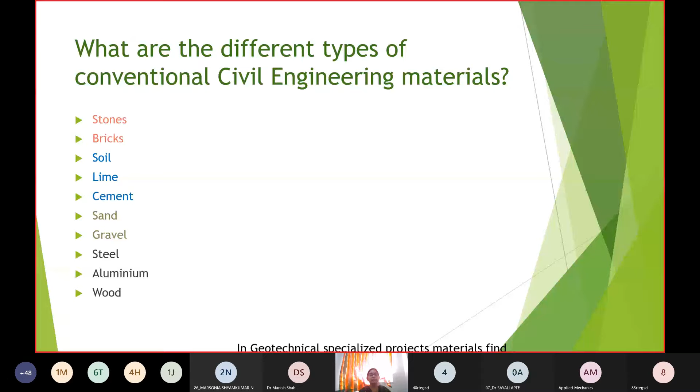So these are the materials which we generally use. And if I talk about applications oriented towards geotechnical specialized projects, geotechnical being my specialization, we use different types of materials in foundations, starting from concrete, reinforcement, cement, and all these. Apart from that, pavements, where subgrade also has a greater role to play to take care of the pavement.

We have different types of pavements, different levels in which the pavement is laid. Everywhere, the material you are using, the quality of material, the type of material, and the life and durability of the material has a role to play.

Embankments are one of the important projects that the government generally takes up. These embankments use a lot of different varieties of materials depending on the project and the type of situation.

Containments, where I talk about maybe a water containment facility, wastewater containment facility, or waste containment facility, be it a municipal solid waste containment facility, a hazardous waste containment facility, or even a nuclear waste containment facility. Every containment facility has a different application and a different purpose to achieve.

Each of these containment facilities needs different requirements or different materials to serve their purpose. We can imagine the extent of research being carried out to identify a suitable material that can act as a good container or containment facility, because it has to take care of a lot of aspects.

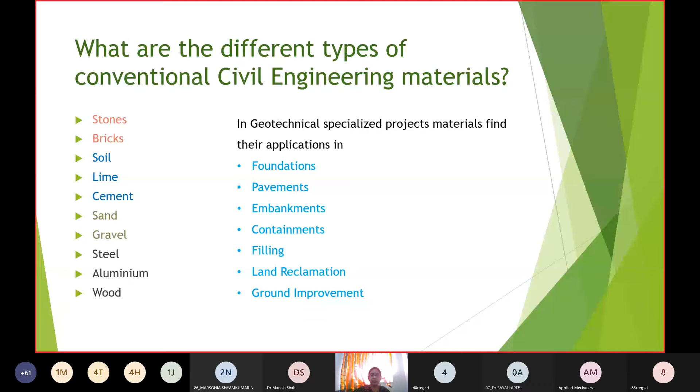Earlier we had a lot of other materials, like initially we had stones. Still man has invented brick. We had soil and lime. Still we have invented cement. And in cement we have a lot of variations depending on their application. So we are not satisfied, or the material itself is not satisfying certain criteria, or we are not satisfied by its performance, and hence we are venturing into some more new materials. What are those issues associated with the existing conventional material that man has faced or has been facing since long?

First of all, it's the availability of material in required quantity and at suitable location at suitable price too. I need the material available all the time for the construction of a project. It should be available in suitable quantity so my project can be completed without issues. Further, it should be available in the required location or nearby the project so I can get easy access to the material, as well as transportation and other costs can be minimized if the availability is near the project site. And of course, the economy of the project matters. I cannot afford material of greater cost that goes beyond the project.

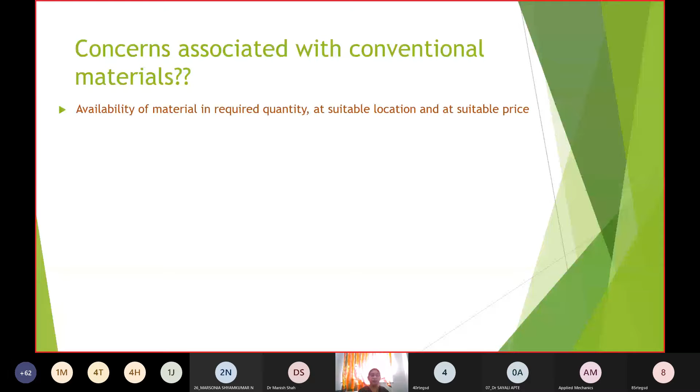So this has become one of the concerns associated with conventional material, which led us to find another solution. When I talk about environmental issues associated with conventional materials, firstly, it's the mining of raw materials. There is extensive mining of raw materials being practiced since long for manufacturing artificial products, so they can be used for infrastructural activities, be it metals, be it stones, whatever it is. We are continuously doing the activity of mining.

Mining has its own concerns in terms of environmental aspects, like taking care of the gases that might come out of the mines. You might have to take care of the water bodies or streamlines adjacent to it, else it might cause flooding, or there might be additional reactions after the mine is dug. So we are actually disturbing the natural state of the soil by doing so much extensive mining.

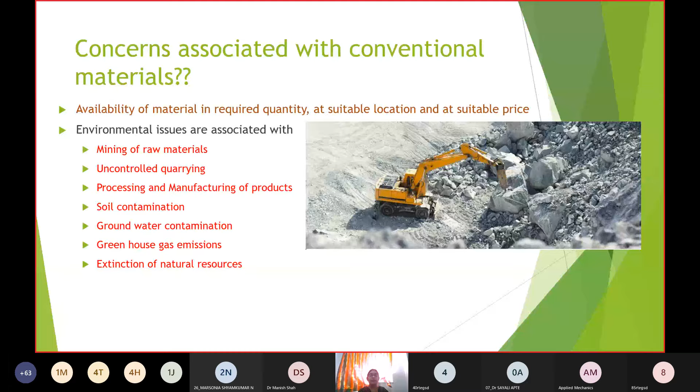And if I leave it open, that will be an issue. It's a great environmental hazard to leave an open cast mine without filling it up properly, because there is a possibility of leaching or creation of acids within the system. And even when I talk about the uncontrolled quarrying going on for rocks, gravel, stones used for construction activity, we are almost destroying all the hills available in nature. So in that scenario, I am disturbing the nature, its stability, its creation and its formation.

So one day or the other, nature is going to revert whatever we have done to it. All these are the human interventions that we are doing to nature.

Next, associated with the processing and manufacturing of products, when all the raw materials or minerals that I have extracted are sent further for processing or production of some other material or manufacturing of its product, in that process I am creating a lot of pollution to the environment in terms of air, water, or solid waste. I am creating a lot of byproducts.

I am releasing a lot of gases that are depleting my environment. I am releasing a lot of leachates, or industrial emissions are being let out into the adjacent water bodies, not only contaminating the water bodies but also the soils associated with them. So altogether, an industry system working to produce a few tons of material is creating multifold times of emissions into the environment, which is degrading the quality of the environment.

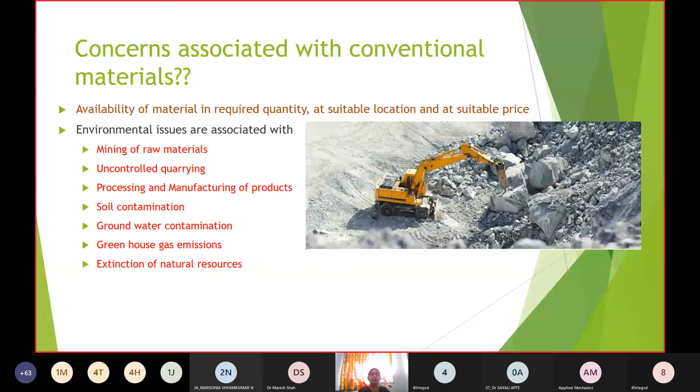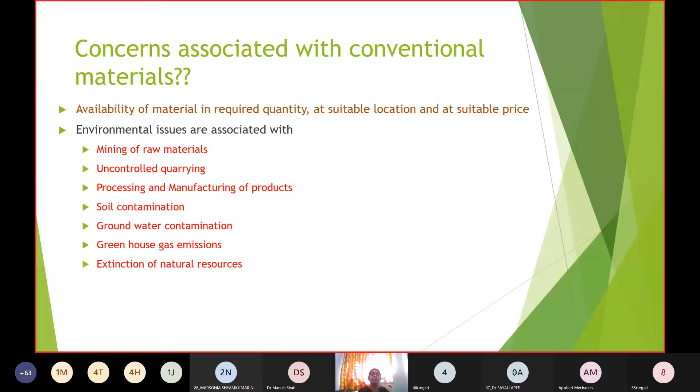So the next concerns, other than the environmental and availability concerns, the soil also undergoes certain reactions. When I put cement or lime as filling or stabilizing material, these materials undergo a cementitious reaction and release heat, called heat of hydration. This heat of hydration leads to moisture migration, which is unwanted.

The heat generated during the reaction of cement or lime present in the soil leads to unwanted moisture migration within the soil, which might lead to differential or non-uniform stresses within the soil, and ultimately cracking of the soil. Cracking is one such aspect which is under research, where people are trying to understand the mechanism and find applications to minimize or arrest these cracks.

I have done my thesis under the guidance of Professor D.N. Singh to stabilize or arrest cracks using sustainable materials like blast furnace slag and red mud, for minimizing cracks in different types of soils. We have been quite successful in this regard too.

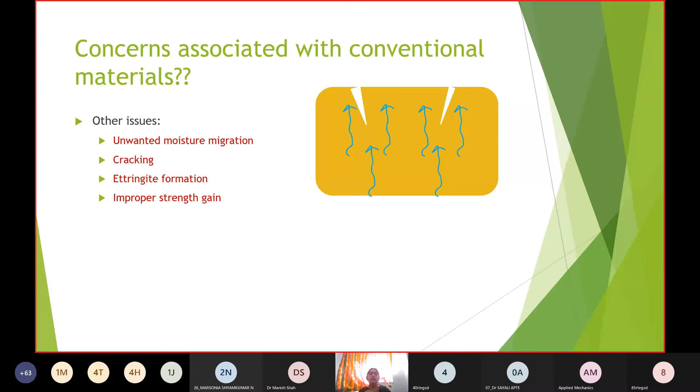Sulfate bearing soils have a tendency to form ettringites, which are nodular type structures that form in the presence of calcium. Calcium, when used for stabilization, forms calcium hydroxide and other cementitious products so they create a proper bond between soil particles and thereby improve the soil's properties.

But what actually happens when I use calcium bearing substitutes in sulfate bearing soils is they form ettringites, which are calcium sulfate hydrates. Calcium, instead of forming hydrates, directly forms sulfates, and these calcium sulfates make the soil swell in excess of its permissible limit, thereby affecting the integrity of the soil.

Improper functioning of these materials present in the soil, due to lack of curing or lack of proper environment of temperature and moisture, would also disturb the strength gain of these materials or the soil.

Ultimately, are these materials performing perfectly fine in the ground as they perform in superstructures? This is a major concern, where we question the functionality of the materials - not only their environmental issues, but also their ability to improve the soil or perform well for the requirement they've been chosen for.

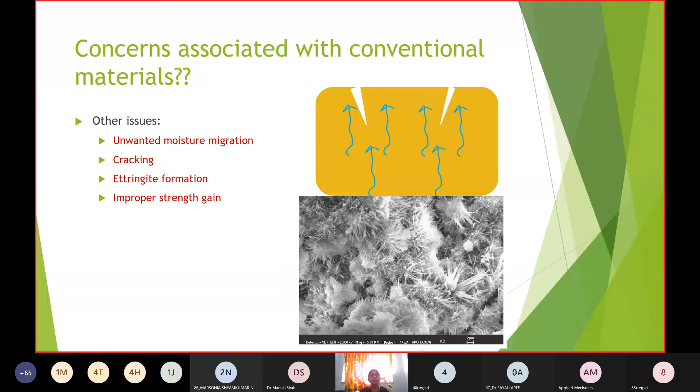So when we have so many issues or problems associated with conventional material, the next alternative in our mind is how to substitute these materials. What materials are available? The only thing other than natural materials that we have in excess is man-made waste. This is the only thing available in plenty and is underutilized as per the norms or the research being done.

Something where we are not touching the natural resources, and we have some other alternative which is going to suffice our requirement. These man-made waste are nothing but industrial byproducts, which we create out of many anthropogenic activities for the development of a nation, economy, and society. So we'll discuss some industrial byproducts in this lecture, and also the constituents of municipal solid waste.

Municipal solid waste in our country mostly comes in the form of mixed waste, comprised of a lot of other constituents which are not only food and organic waste. You have a lot of inert waste present in it - plastics, glass, ceramics, construction and demolition waste, and a lot of soil or inert materials that come out of household and other activities.

So there are some materials even in the MSW which are not degraded, which affects the functioning of the landfill and also add on to the volume of the landfill unnecessarily. All these materials are the waste that are coming out of anthropogenic activities.

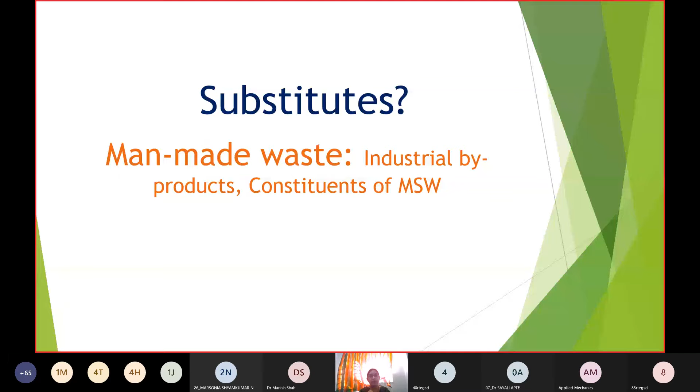Now, I would rather say, if I am able to use all these materials as substitutes by looking into their properties, why should I call it man-made waste? Why not call it man-made resources?

During my PhD, Professor D.N. Singh and myself evolved this term of man-made resources, and even during the keynote lecture of Professor D.N. Singh, he was mentioning about man-made resources, which are nothing but all these products that we create out of extensive industrial activity, and the waste we create out of our domestic activities. All these form the man-made resources.

Now, what could be some of these, or why should we call them resources, why not waste? Firstly, the availability of these materials is not at all a concern, because you have plenty of volume of these materials lying unused and simply going to waste instead of being brought into proper use. Nothing is waste - everything has an application somewhere or the other. We just need to identify those applications and use them properly.

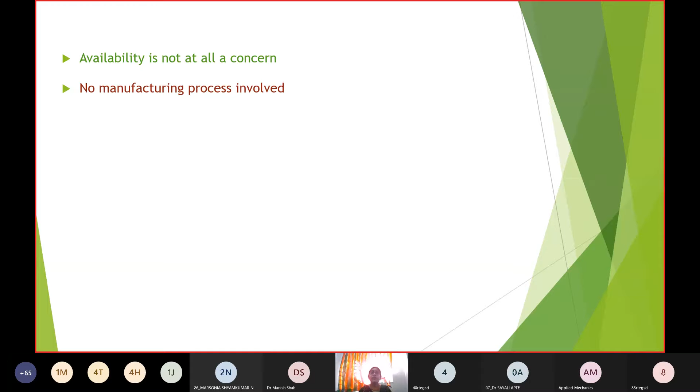Next, there is no manufacturing process involved because they are already byproducts of a manufacturing process. So I can severely cut down on the cost used in manufacturing, and I am also cutting down on environmental concerns or issues associated with the manufacturing process. So these products act as good substitutes where materials are being processed or manufactured.

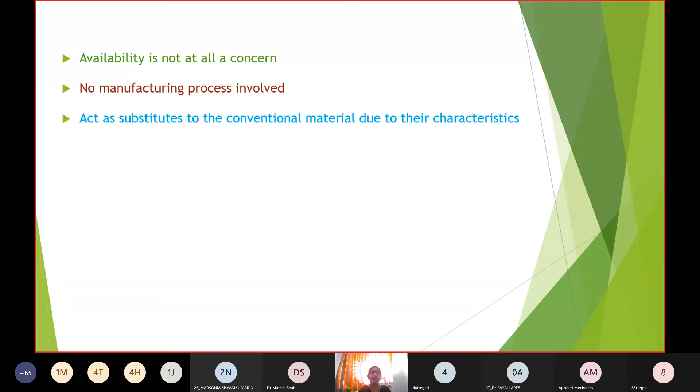They act as good substitutes for conventional materials - through research, their characteristics, properties and performance have been identified, such that they are able to substitute conventional materials through their performance and through their composition.

Next, the cost involved is only the transportation cost, as we've already discussed there is no manufacturing process or technique associated with it. It is only the cost associated with transporting material from wherever it is being produced - the bare minimum cost one has to bear when going with any activity or project. I am also cutting down on the consumption of natural resources or raw materials.

This is one of the most significant add-ons to these byproducts or waste materials, because if I am able to substitute these conventional materials, at least to some extent, I am tremendously cutting down on the misuse or overuse of natural resources, so that I can save a lot for future generations. I am not emptying the mother earth, or making my future generations thirst for such availability of minerals.

The major aspect associated with these byproducts or waste materials is their storage and disposal. How much should I store? How much can I store? What is the volume being produced and what is the volume I am able to store? How much land will be available for storing so much material?

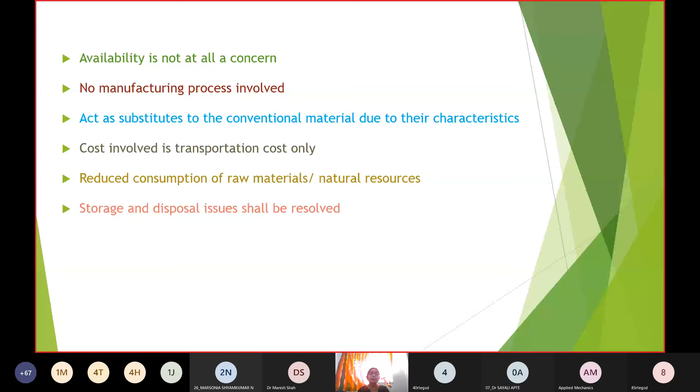How much land is available again to dispose them off in the landfills or within the premises of the industry? That has become a big concern. So if I use them in bulk for my infrastructural activities, the volume can get consumed, thereby reducing the amount to be stored or disposed of.

Life of landfills can be increased because these materials are not going back to landfills for disposal, since I am using them for other applications. Even if I have land for storing or disposing these materials, there are environmental and health issues associated with discarding this waste without proper care. These materials are very fine in nature and might contaminate the air. If there is any leaching when in contact with water, groundwater or soil might get contaminated, and heavy metals might leach into the environment. If it contaminates groundwater, it enters the food cycle, and if released into the air, there are respiratory problems associated.

So every byproduct or waste material cannot just be discarded in the landfill or incinerated. There needs to be some consuming ability for these materials, so we can use them up such that they do not become a burden to the industries, while also taking care of the needs of the growing infrastructural activity, modern technologies, and modern construction practices.

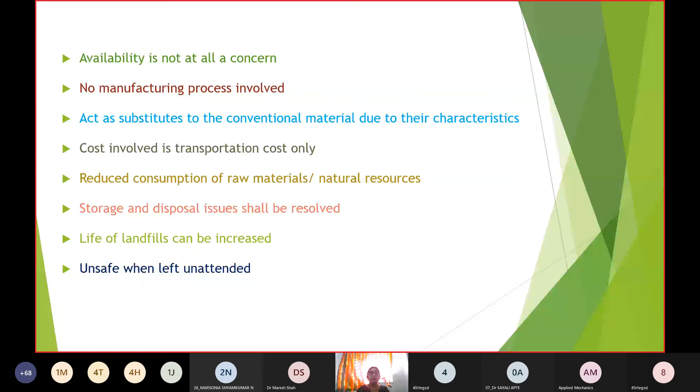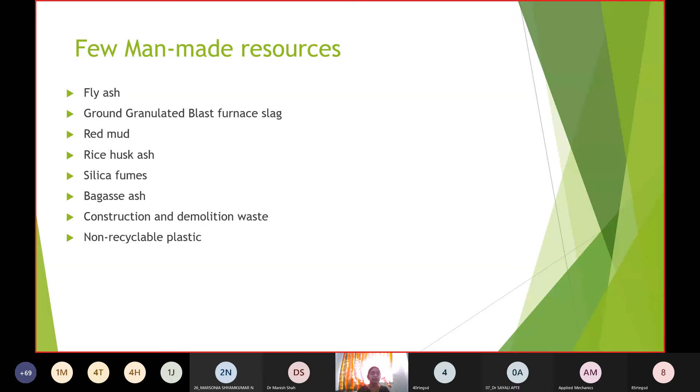So going into the availability of construction materials, some man-made resources I'd like to discuss are fly ash, ground granulated blast furnace slag, red mud, rice husk ash, silica fumes, bagasse ash, construction and demolition waste, and non-recyclable plastic. These are some of the resources I'd like to present a few intricate details on.

Fly ash is a byproduct of thermal power plants. 70% of the power generation in our country depends on thermal power plants, which use coal as the raw material. I cannot stop the production of power, because without power the growth of the economy or human life comes to a halt. Even a power cut for 1 hour makes our life suffocated, so this power generation cannot be put on hold.

For generation of power, I need raw material like coal and burn it to run the turbines. When burning coal, I produce ashes called fly ash. This fly ash is very fine, in powder and amorphous form, which when left unattended creates a lot of respiratory problems. And imagine the amount - we have around 250 million tons of fly ash being produced per annum in our country.

People, governing bodies, industries, engineers and scientists have realized that this material has potential and can be used for many applications in the construction sector. Policies have been introduced by the government to make this material available within the vicinity of construction activity or near the plant at cheaper prices, so the material can be consumed in volumes and the amount disposed of or left open can be reduced. So far 78% is being consumed by the construction sector, and the government is aiming to reach 100%.

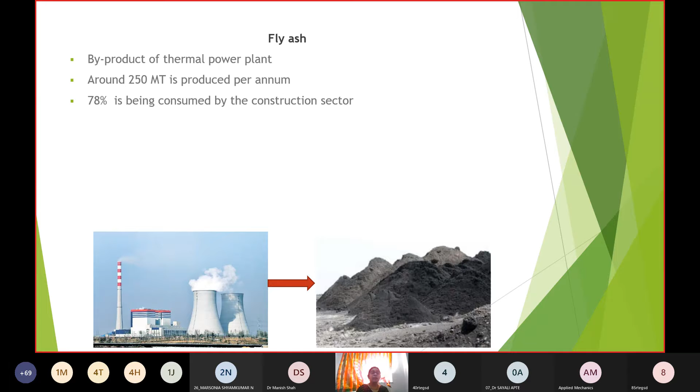Looking at the applications, fly ash is used to make bricks and cement, with almost 30% replacement in cement. It is used in making concrete, tiles, roads, even as filling material, and in reclamation of land. In agriculture and land development, fly ash improves soil properties and fertility. It is used as a soil stabilizer to improve engineering properties because of its pozzolanic nature - the tendency to form cementitious products in the presence of the right pH conditions or an activator. It is also used in making zeolites.

Professor Singh has spoken about zeolites in the keynote lecture, these being active materials used in many sectors like agriculture for controlled release of fertilizers. Zeolites can be natural as well as artificial. Fly ash can be used to make such artificial zeolites, which can improve soil properties in terms of water retention ability or nutrient retention ability.

So such is the scope of fly ash, and we are able to achieve up to 78% consumption of this fly ash, and research is still going on in finding more applications or more suitability of this fly ash. And depending on its source of coal or type of coal, the type of fly ash also varies.

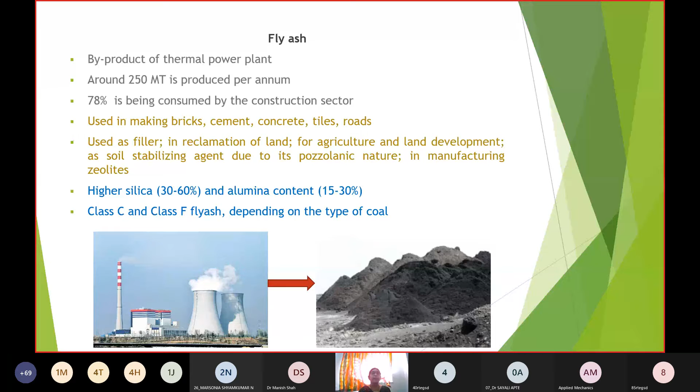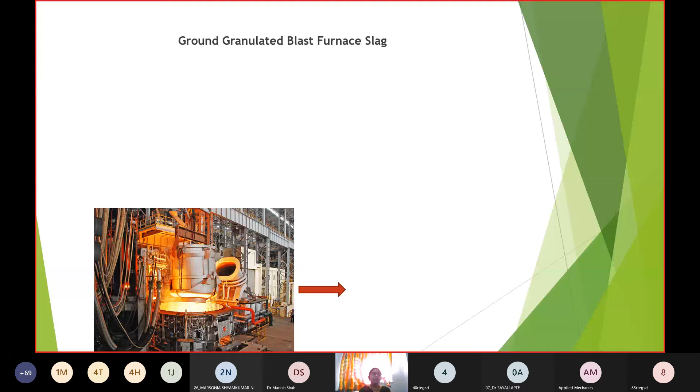When I talk about ground granulated blast furnace slag, which comes as a byproduct from a steel or iron manufacturing plant, after extraction of the pure form of iron, whatever molten material is left is considered waste or slag, which is cooled to form the slag. Now, how I cool this, whether rapid cooling or gradual cooling, decides the product that is formed.

Whether I am creating granulated blast furnace slag or pelletizing it depends on how I am cooling it. Ground granulated blast furnace slag is obtained by rapid cooling of the molten slag coming out of the steel plant. For every ton of pig iron processed, I get around 300 to 540 kg of slag, and for every ton of steel produced, 100 to 150 kg of slag is produced.

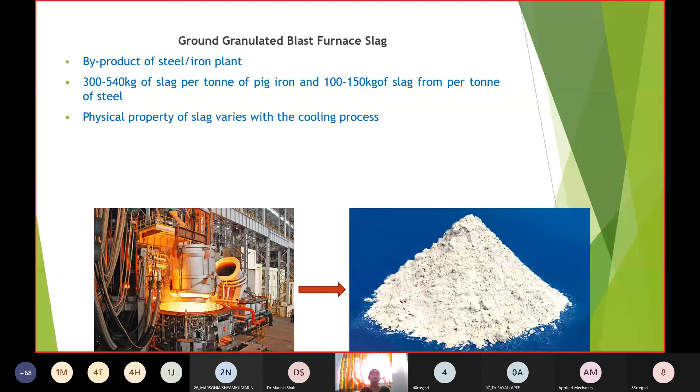So the volume again is tremendous and is available in huge quantities that is just being disposed of as it is. After quenching of the molten slag, granules of slag are created, which are ground or processed further to make this fine powder, as you see in the picture.

The physical property varies with the cooling process, as I was mentioning. Gradual cooling results in a crystalline form of slag, while glassy and amorphous slag is created due to quick or rapid cooling of the molten slag. Whichever slag is created has its own properties and application, usable for multiple activities. We have studied in civil engineering materials that you can create different forms of cement using slag.

We have Portland slag cement and Portland pozzolanic cement, where slag is a good substitute. One special aspect of slag is its low heat of hydration. This low heat of hydration suffices one aspect of cement, which has very high heat of hydration. So where there is possibility of reducing the heat of hydration to control unwanted moisture migration, which leads to cracking of soil, I can use this slag as a replacement with a sufficient or suitable activator, so that it can enhance its properties and perform well as a cementitious material.

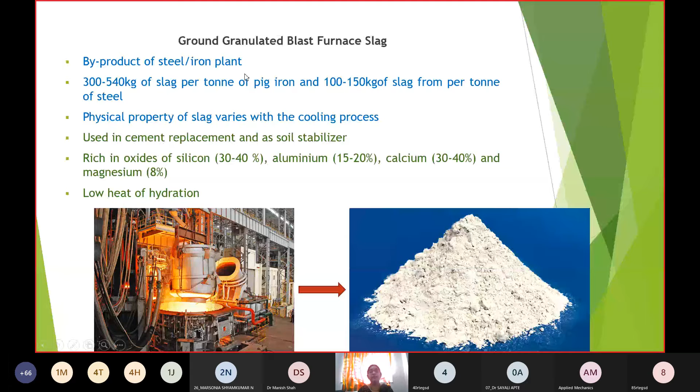So you have heard very much from Dr. Hanmant Rao, where he spoke about bauxite residues. So you might have a good understanding of what red mud is by now. It is a byproduct of alumina industry and bauxite residues. Bauxite, when processed by Bayer's process, gives or generates the red mud.

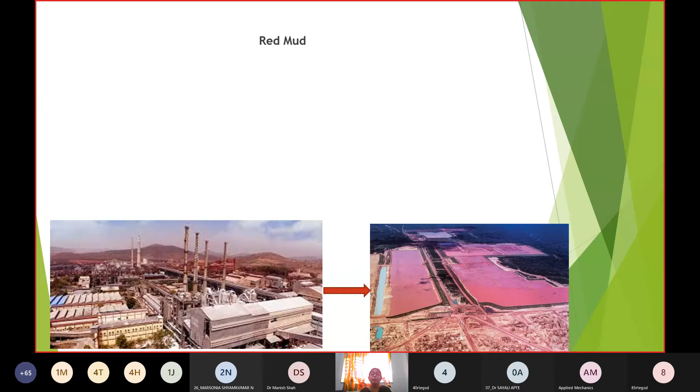So for every 1 ton of aluminium or alumina that is produced out of bauxite by Bayer's process, around 1.5 to 2 tons of red mud is produced. So around 1.5 to 2 times of red mud is created when alumina is manufactured.

I cannot cut down on utilization or production of alumina for the growth of the economy, for the demand that I have to meet. Hence I continue the production of aluminium, the production of steel, power, everything. But I cannot cut down on these byproducts that are coming out.

So the red mud, having its attributes of iron oxide, alumina up to 30%, titanium dioxide up to 15%, silica up to 50%, and calcium oxide up to 14%, can be used as one of the substitutes as a land reclamation material, or it is also acting as another raw material to extract the ores that are present, like titanium or iron oxide present inside this material.

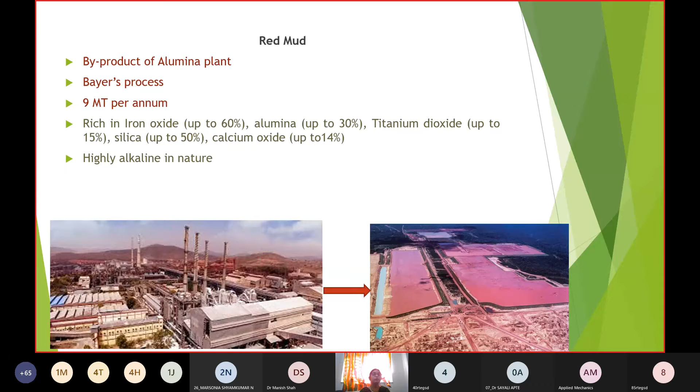And its pH, because caustic soda is used during Bayer's process, the pH of the red mud that comes out of this process is also very high. So this pH is also being used for many applications where it has to take care of treatment of wastewater or for altering the soil's properties.

And it can also be used as an activator with other materials, like the other pozzolanic materials we've been discussing about, like fly ash or slag, which requires a minimum pH for its activation, for the etching of silica to happen, so that the cementitious products can be created.

Hence, red mud takes care of that activation process too, which I have worked out in my thesis and have used it as an activator in the slag too, and I have observed good results when I used only slag and red mud and slag associated together to improve the properties of the soil. So that is one of my experiences.

And if we look into the other applications, it is used in making cement, bricks, tiles, geopolymer concrete. Soil modification can be done by using red mud. It can be used in wastewater treatment, can be used for filling up of mines and roads where voluminous or bulk consumption of the red mud is going to happen.

And it can be used even for removal of heavy metals. And as mentioned, you can extract iron and titanium present inside this red mud for other processes. And red mud, if left unattended, is going to create a lot of respiratory problems again. And if you look into the alumina plants, you can find a lot of hills of this red mud available. It requires good application or good research for voluminous consumption of the red mud so that I can reduce these deposits.

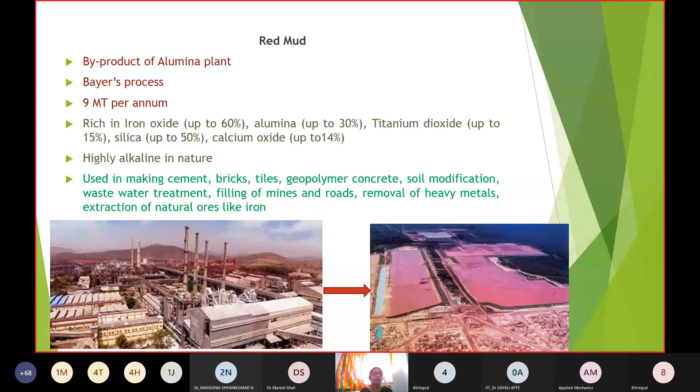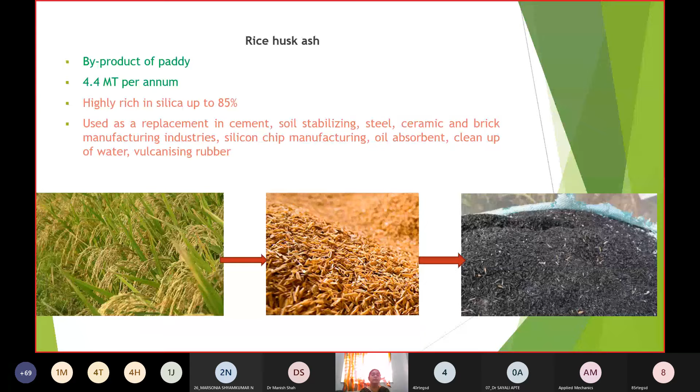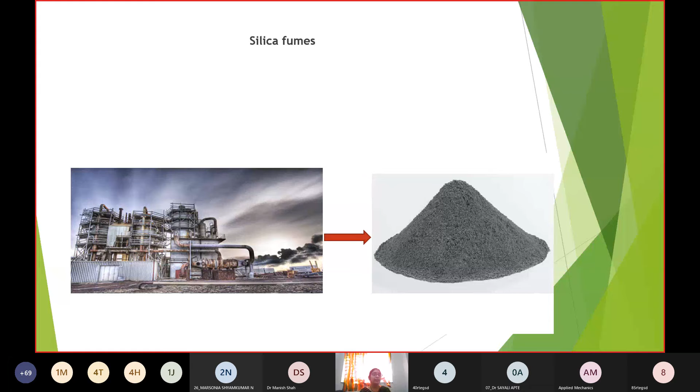Next is silica fumes, from the sector producing ferrosilicon alloy or silicon. Silica fumes are also called microsilica, produced around 1.5 million tons globally. This material is basically pozzolanic and amorphous, containing around 95 to 97% silica, and is extremely used in production of silica gel, silicon carbide, and for creation of impermeable concrete. Silica fumes are especially used to create a type of concrete that is impermeable and highly resistant or water repellent.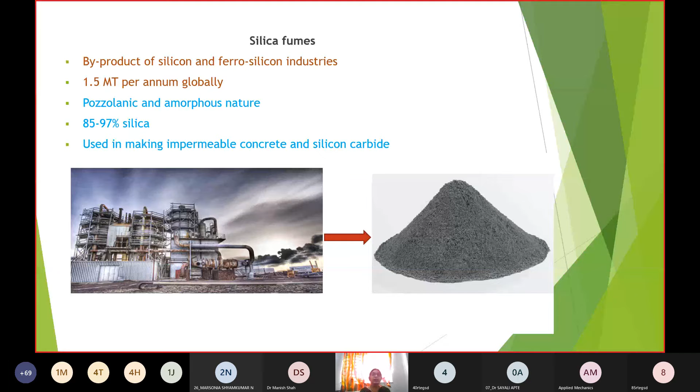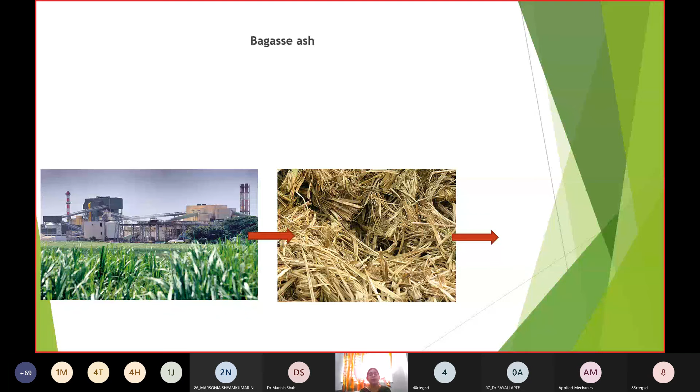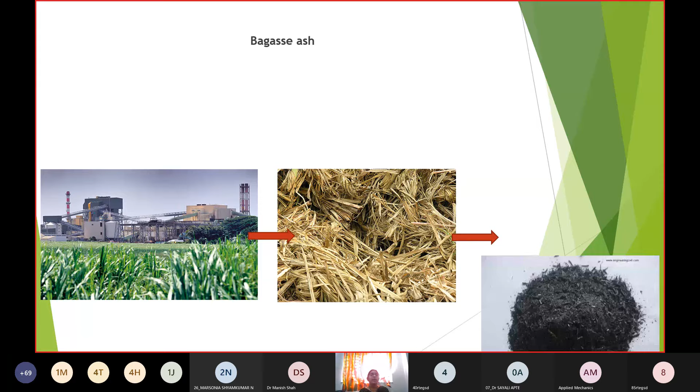Next is bagasse ash. After paddy, sugarcane is the major agricultural product generated in India. Once the juice is extracted from sugarcane, the sugarcane pulp or bagasse remains, which can be used as a fuel in many industries as a co-generating fuel. When this pulp is burnt to residues, it creates bagasse ash. This ash is produced around 9 million tons per annum in our country, and it has around 60% silica and is again pozzolanic in nature.

One aspect we can identify from all these byproducts or waste is that they are pozzolanic in nature and have good silica content, making them good functioning materials for infrastructural applications when reusing them. They are thus used as a replacement for cement, in creation of silica gel, as an absorbent in water treatment, in cogeneration processes like for cement or brick industries where they act as fuel in one stage of manufacturing, for ground improvement to improve soil properties, and also as ash filters.

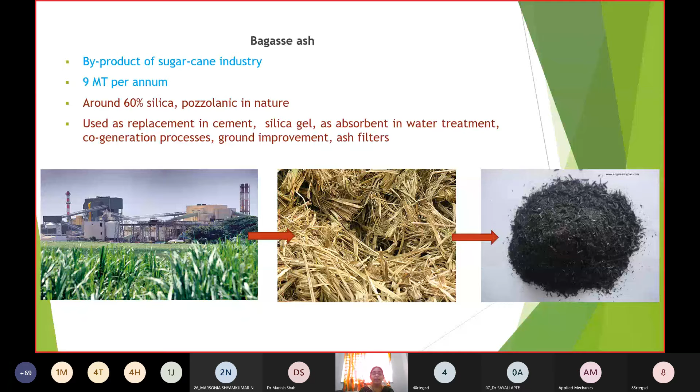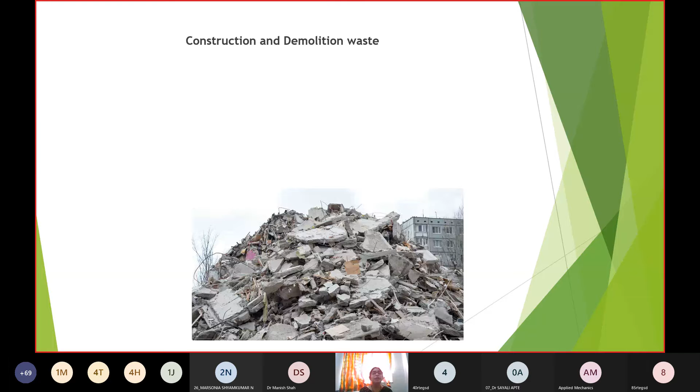Next is construction and demolition waste, something we have not observed or looked into as a resource. Everywhere there is construction activity going on, some sort of waste is created through the process of construction, demolition, repair, or renovation, consisting of material like bricks, rubble, dry plaster, plumbing fixtures, plastics, glass, metal, wood, and asphalt.

If properly segregated, this is one of the major inert materials going to the landfill, only creating volume with no further application in terms of incineration. Unlike organic or vegetable waste, which can be used for fuel generation through biomethanation or incineration or converted to compost, construction and demolition waste has no aspect of fuel creation and is not degradable. So it just adds to the volume of the landfill, reducing its life.

If I can extract the material out of it, or segregate and process it further, I would be able to create good recycled aggregate, masonry, flooring material, and fill material. It can be used as good fill material because it is inert and has already been part of construction, with no further environmental issues. Volume is not a dearth, with around 25 to 30 million tons per annum being produced. If I can segregate out the metal and plastics, they can be recycled and used for appropriate activities.

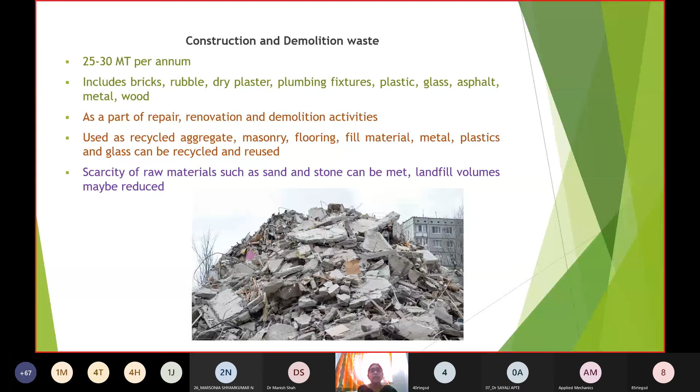Next is non-recyclable plastics. Plastics are basically of two types: recyclable, which takes care of HDPE, PET and similar waste, and non-recyclable, such as foams, thermoset type plastics, laminated plastic, which cannot be recycled. Even recyclable plastic has a limit to the number of times it can be recycled.

The life of the plastic reduces with every recycling activity, so we have this waste piling up every time. Plastic consumption has increased tremendously over the past two decades, and the waste being produced is also too much.

So if we can bring up the non-recyclable plastics and use them in co-processing of cement as a fuel, with proper care so that no toxins are emitted into the environment, we can bring a good volume of use in co-processing. The plastics can also be used in polymer blending.

For bituminous roads, plastics can be shredded and mixed with bitumen, used for laying hydrophobic roads that are resistant to water, creating good quality roads by mixing these plastics with bitumen at high temperatures.

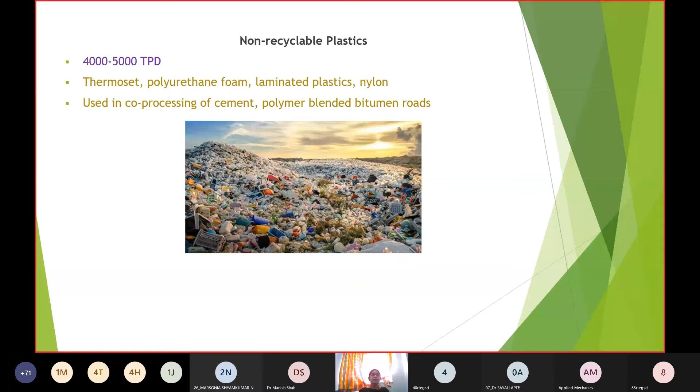These are some of the materials I have discussed. Apart from this, we have palm oil fuel ash. Palm oil is gaining demand these days for various aspects like cosmetics as well as the food industry.

Non-recyclable glass and non-hazardous inerts going into the landfill come out of various activities in landfilling itself. If we are able to use or find applications for these materials, they can become good reusable or recyclable materials and used as geo-materials, cutting down on the use of natural or raw materials. These materials can also be proven environmentally safe, or processed so they become environmentally safe before being put directly into soils or for any constructional activity.

So one thing we can conclude when we look into all these materials is that these man-made resources can be called sustainable materials, because they create an ecosystem which is sustainable within itself, without demanding more and more raw materials from nature or from Mother Earth, maintaining the system sustainable within itself while satisfying its requirements. That's why these all contribute to sustainable materials.

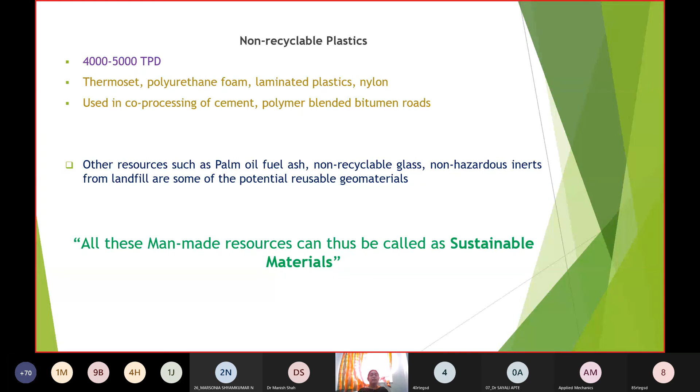One aspect that Professor Singh and myself developed during my PhD at IIT Bombay is that sustainable development can be put in terms of extraction of minerals for industrial development from the geo-environment or soil, which leads to mining. From mining, when these minerals are processed through industrial activity, we create products and also industrial byproducts. These industrial byproducts will be unsafe to the environment when left unattended.

So these volumes, if processed, can be used for ground modification or other applications in soils or construction activity, which would definitely take care of the emptiness created by extraction of minerals through mining. So we are giving back to the earth what we have taken in the form of mining.

At least to some extent, I am able to replace the minerals that have been extracted through the process of ground improvement by sustainable materials. So altogether, my system has become sustainable, and we term this as sustainable development.

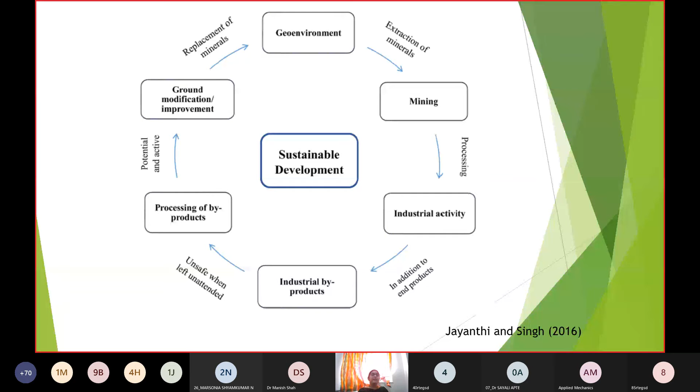Dr. Manish: Yeah, thank you, madam. Thank you very much for your very informative and deep learning lecture. Thank you, sir, thank you so much.